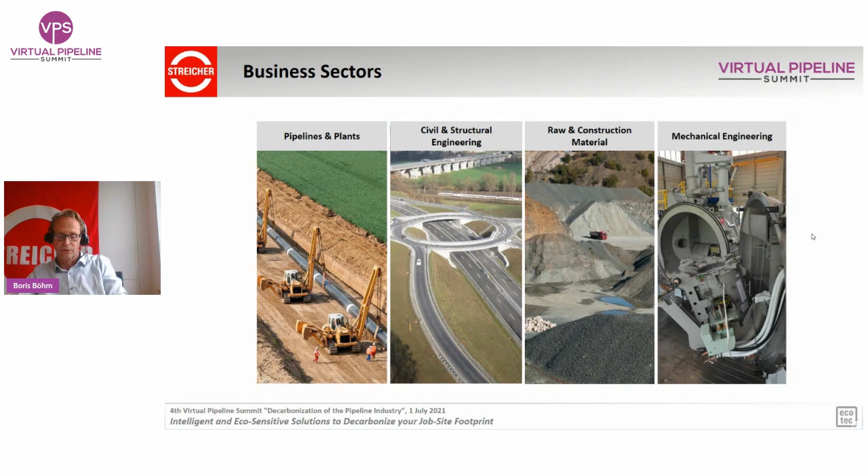I will, no, it should go on here. Yeah, I will keep this part very brief and promise that this overview does not serve as a self-presentation. I simply want to work out that the different activities within our group do present us exciting challenges and job sites every day.

The work within one of the main divisions of the business sector, pipeline and plants, and also within the sector of civil and structural engineering is, in all cases, more or less performed on job sites. And especially pipeline jobs are usually located in the middle of defenseless nature that definitely needs to be preserved directly and indirectly.

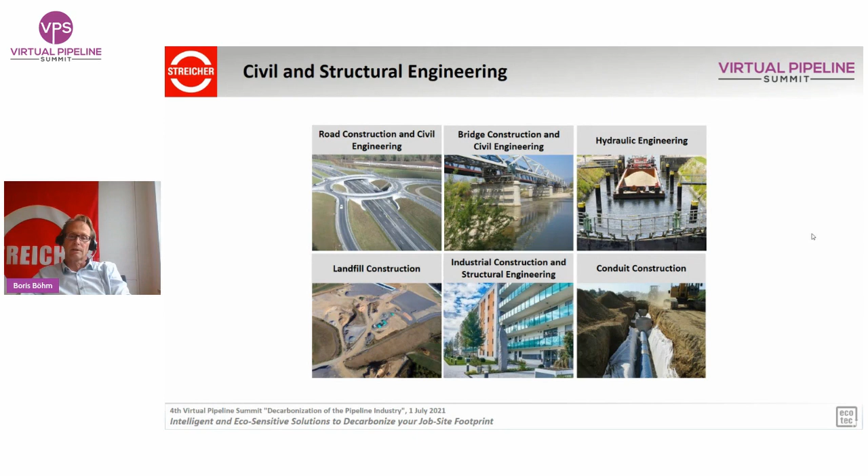And the facilities of our raw and construction materials sector are more or less equal to permanent job sites. Summarizing these 3 business sectors mentioned so far, we can state that the STREICHER life is pretty much about job sites.

And next to these classic job site sectors, another core competence of the STREICHER Group lies in the field of mechanical engineering. This area deals, among others, with process and apparatus engineering, innovative drilling technology, and special equipment engineering. And it is our understanding that also all divisions of our mechanical engineering sector must deal with environmental safety right from the beginning of their developments.

Sustainability directly determines in manufacturing itself. With all processes we use, our experience as a construction company and the possibility to develop and manufacture high complex equipment ourselves to create and ensure eco-sensitive solutions.

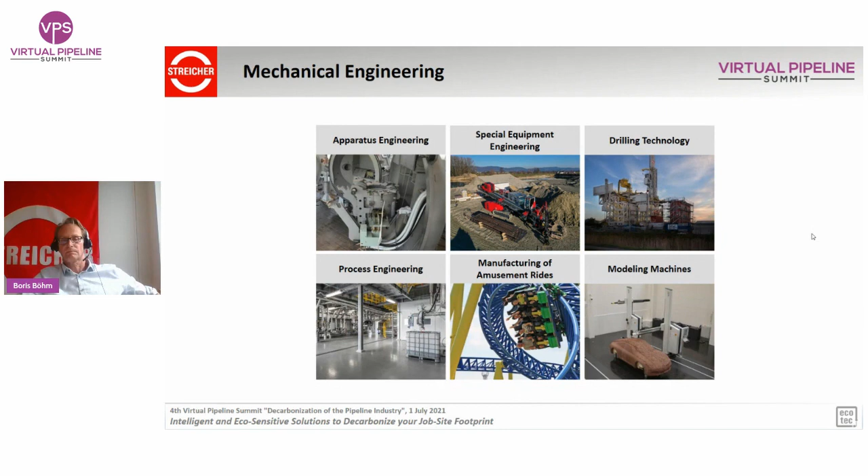But why do we address the idea of job site decarbonization? The answer is obvious. The need to protect Mother Nature is not only on everyone's lips, it is undisputed in terms of content. A corresponding ecological awareness is gradually coming to the fore among private individuals, politics, and companies. The need for action and possibilities for action exist on all levels of human existence. The responsible use of resources is essential if we want to preserve our planet.

Our sectors, energy, transport, and industry, are without doubt among the largest contributors to global CO2 emissions, with the construction sector accounting for a significant share. The requirement to decarbonize the pipeline industry is consequently undoubtedly mandatory. Here, optimizing the ecological footprint of job sites is still an underestimated piece of the puzzle.

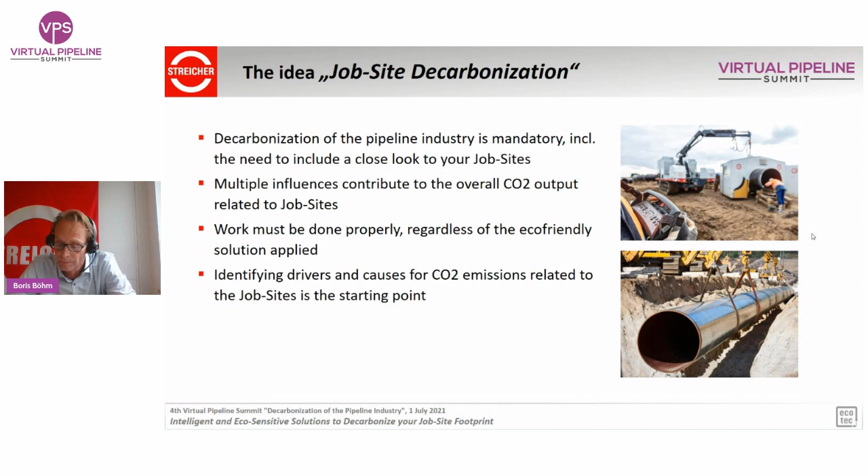As mentioned, there are many influences that contribute to the CO2 output related to our job sites. Of course, the job itself has to be done, where a predefined result must be delivered within a specific timeframe and budget. Hence, in the first step, it is important to identify the drivers and causes of carbon emissions on the projects.

The findings can almost all be divided into the following three CO2 producer groups: first, planning and logistics; then technologies to be used; and equipment to be used. Whereas CO2 calculators are available for the ecological footprint of individual private households, unfortunately there is no general tool that allows us to calculate the overall output typical of complex pipeline job sites in one step.

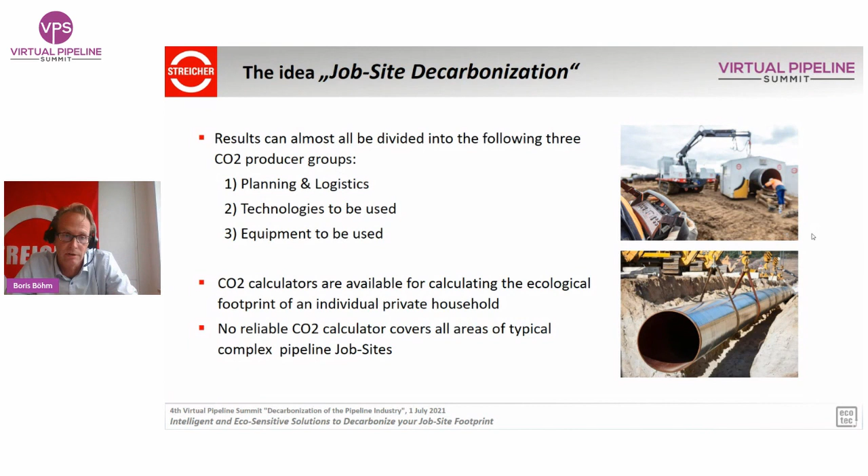But the good news is that most areas typical for pipeline jobs can be identified easily in terms of their emissions. In accordance with the German saying, Kleinvieh macht auch Mist, which compares to many pennies make a dollar, it is important not only to focus on the big picture, but also to look for small sources of CO2. At the bottom line, the saving on each individual job site does count.

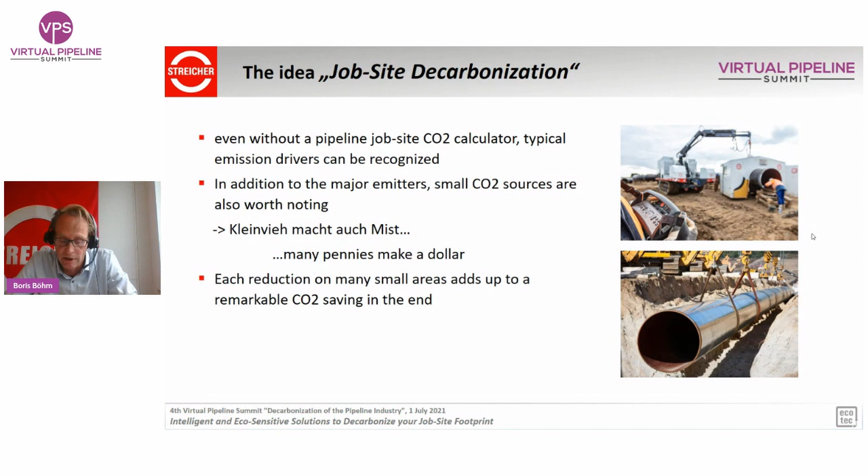Two slides earlier, we identified those three groups typical for emissions related to job sites. Within these groups, it is worth looking for CO2 saving potential. The first group we have formed includes the task of planning and logistics.

Trials have shown that through optimized planning and well-structured logistics, up to 40% of project duration can be saved, which automatically means that CO2 emissions can be significantly reduced simply by keeping the construction site infrastructure available for a much shorter period.

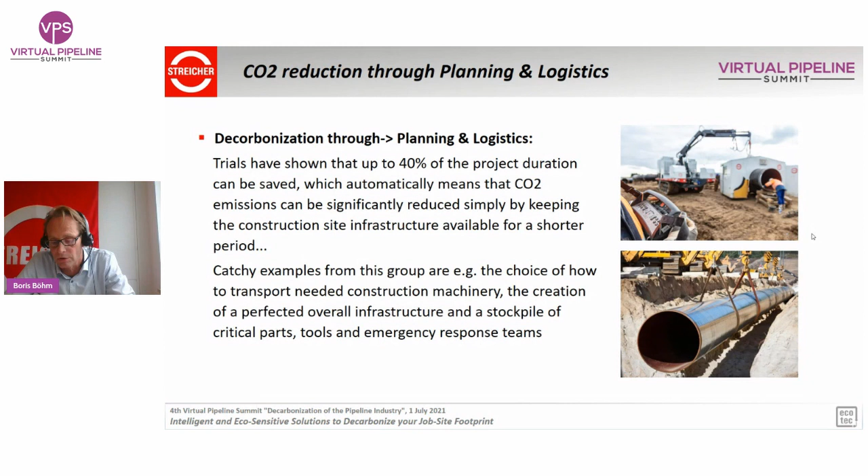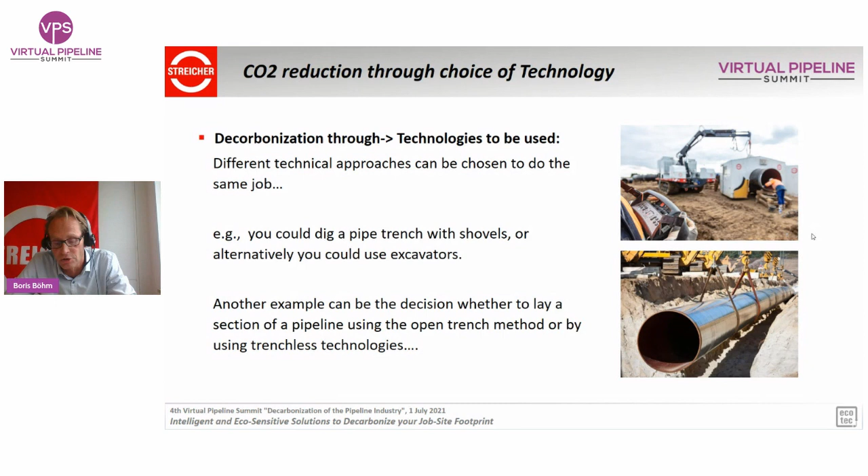The second group, CO2 reduction through choice of technology, is about the technical methods used to do the job. For example, an easy example is whether you dig your trench with shovels or use excavators. Another example could be whether to lay a section of pipeline using the open trench method or using trenchless technologies.

Using a carbon footprint calculation to compare trenchless construction with the conventional open trench method, consisting of opening the trench, transporting the extracted materials, and backfilling the trench with new material, identifies amazing results.

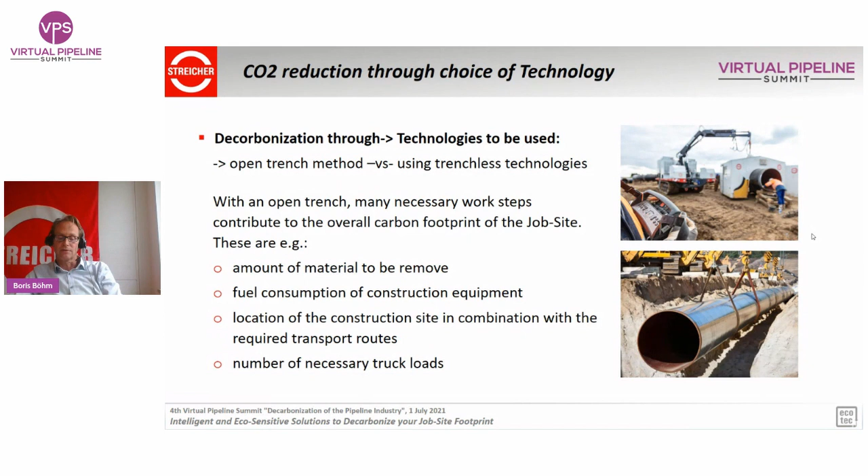A significant reduction of more than 80% in carbon emissions is mainly due to about 90% fewer truckloads required, but also the much shorter time and need for excavation to dig trenches and pits, resulting in a significant saving of up to 85% of diesel consumption.

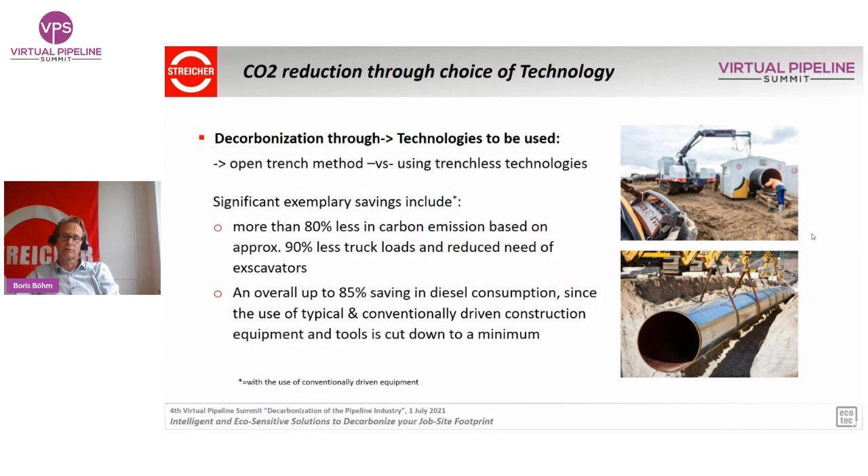What is already known and accepted in private mobility is now increasingly being found in the construction machinery sector: the electric drive. Electric motors are real alternatives to the tried and tested diesel engines and remain emission-free.

If you question how much emission can actually be saved with e-construction machinery, for example, a 14-ton diesel excavator burns about 120 liters of diesel in a working day. In a year, it thus emits 32 tons of carbon dioxide. In contrast, the fully electrical counterpart of this diesel excavator runs completely emission-free.

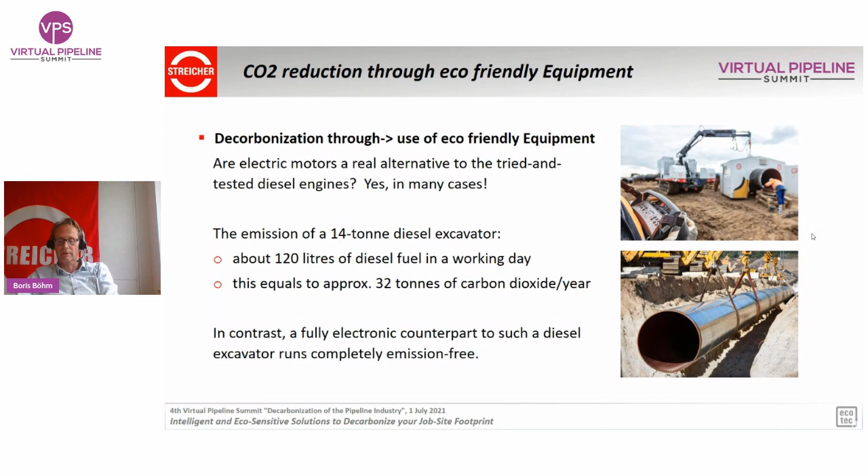However, since the available solutions on the market regarding construction machinery do not always meet our goal of an extensive reduction of CO2 emissions, we at STREICHER have decided to close this gap by building some of our own equipment, which are, for example, powered by electricity, hydrogen, or fuel cell. Our practical experience and multi-layered competences assist in integrating new technology into corresponding modifications and new developments. Our solutions are summarized under a label that we call ecotec.

In line with the goal of decarbonization, the ecotec label combines innovative technologies with forward-looking trends. At its core, it unites the aspects of resource preservation, environmental protection, energy efficiency, and optimization of the entire energy cycle, which finally helps to significantly reduce the ecological footprint.

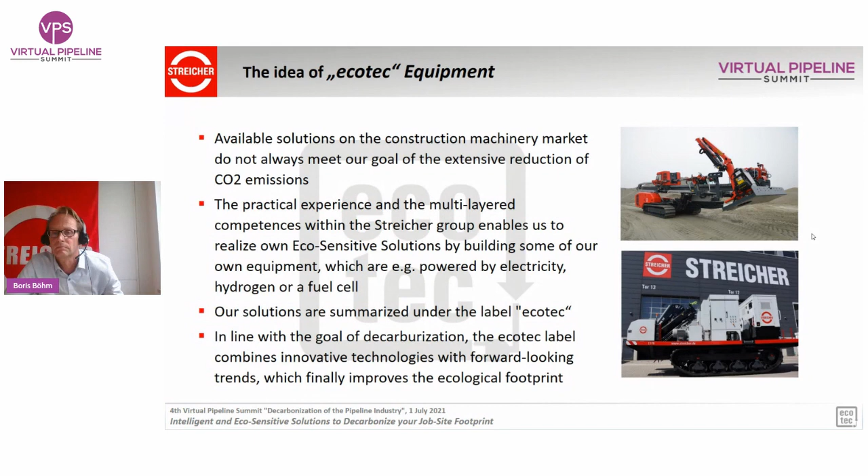One of the first heavy equipments developed that meets the demands of our ecotec label is, for example, our fully electrically driven horizontal drilling rigs. The ecotec certified HDD rigs, like the HDD 80E, can be described as future-focused equipment: quiet, eco-friendly, safe, sustainable, powerful, and cost-effective.

Our innovative rig concept, which has already proven to be a complete success in various projects, is largely fully electrically powered and can also be operated directly with electricity from a socket on a land line. Of course, the ecological icing on the cake would be if the electricity used from the socket is supplied as green electricity.

I don't want to get lost in all the amazing technical details and special features of our rig series, but I'd like to add that the rig is very quiet, which gives it a high level of acceptance in residential and natural conservation areas, and also has advantages for occupational safety and for its operators.

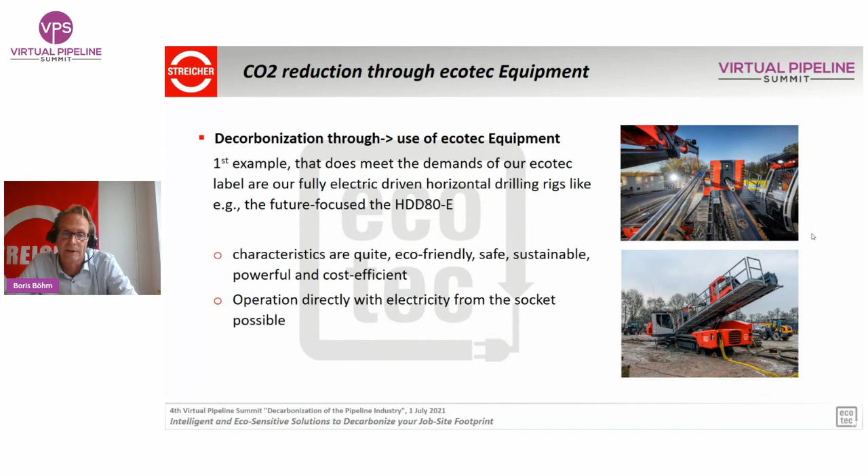The second realized and field-proven ecotec qualified machine from our range is our innovative remote-controlled welding tractor called Weld 150E. That also comes with a unique, eco-sensitive special feature: the use of the technologically advanced electric drive system eliminates the need for a second diesel engine normally used on most pipe welders.

This results in minimizing the overall fuel consumption and CO2 emissions, as well as operating and maintenance costs. In this case, a 150 kVA generator in the model 150E provides the power needed to drive the tractor, power the welding sources, and operate the crane.

The electric drive system and the crane are operated with a single combined radio remote control. The general layout of the electric-driven tractor is based on a modular system that allows the unit to be configured for a wide range of applications.

In addition to the remote-controlled model, there's also an electric-driven version equipped with a classical driver's stand, which can also be operated in a speedier manner than if you have to walk next to the machine with the remote control.

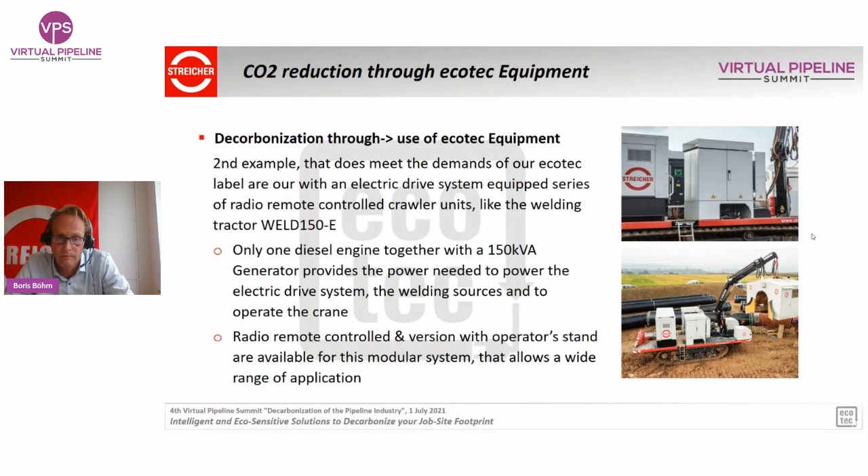In summary, it can be said that the use of electric power, along with other alternative-powered construction machinery, is a major step in the necessary direction of decarbonization of job sites. Among alternatively powered equipment, electric solutions are already available in many areas. Units with H2 technology or fuel cells are still in early stages, but are definitely in the starting blocks.

In addition to these eco-sensitive solutions, other approaches like the modernization of existing technology should not be neglected. Against the background of economic aspects, to save resources and improve our ecological footprint, we have performed a CE-conform modernization of the field-tested Komatsu D355C pipe layer, resulting in a new lifespan for this equipment of another 20 years.

Some of the main advantages of this refurbishment, based on the eco-friendly idea of modernization instead of declaring something still generally good to be ready for scrap, are the emission reduction by replacement of the drive motor with the latest model, CE certification of the entire upgrade, and the mentioned increase of lifetime. Of course, all aspects related to work and operating safety were also brought up to date with our conversion package.

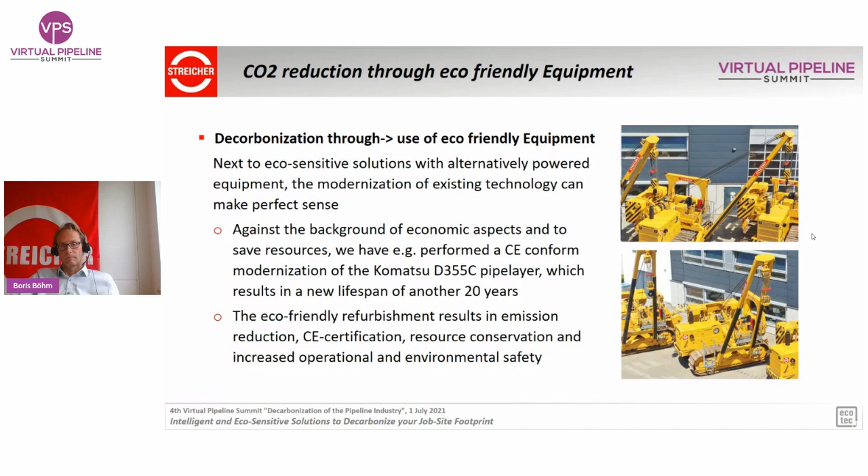Driven by our success with the previous developments, regarding intelligent and eco-sensitive solutions to decarbonize your job site footprints, we are expanding our range of ecotec equipment and correspondingly certified processes step by step. In addition, we are developing further ecologically improved concepts for and together with various clients, for example in the field of off-road logistics, in laying technology with open and closed construction methods, and also with regard to innovative drive technology and construction machinery. Unfortunately, I'm not allowed to give more details on these exciting projects at the moment, but as soon as it's possible, we will do so.

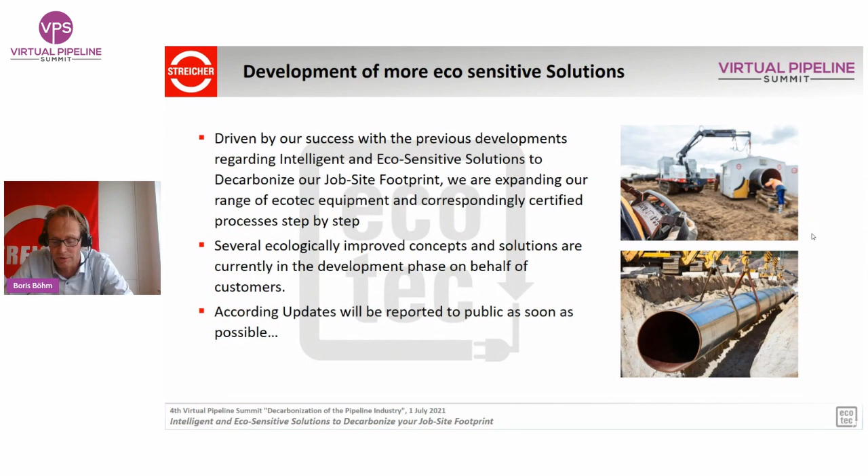Well, now I guess my time given is coming to the end, and I would like to thank everybody for your attention, and I'm looking forward to your questions and a nice discussion about the ideas, and would like to develop some ideas how we can together make all these steps identified to more practice and to decarbonize the industry. Thank you.

Boris, thank you. Really great presentation. I liked to see how STREICHER have taken the initiative to develop their own equipment, seeing the demand there. And I really like how you showed the ancillary benefits of decarbonizing by switching to electric heavy plants, like the noise, the safety, to the health as well of the people around. It's personally annoying to me to see a piece of heavy machinery just chugging away on standby, polluting and essentially wasting. So that's great to see. It's also one of your points about modernizing. It ties in with something I saw in the news here in the UK today, that the government will make equipment like washing machines in the household necessary to repair them rather than throw them away to get a new one. So I think that's another important environmental point.